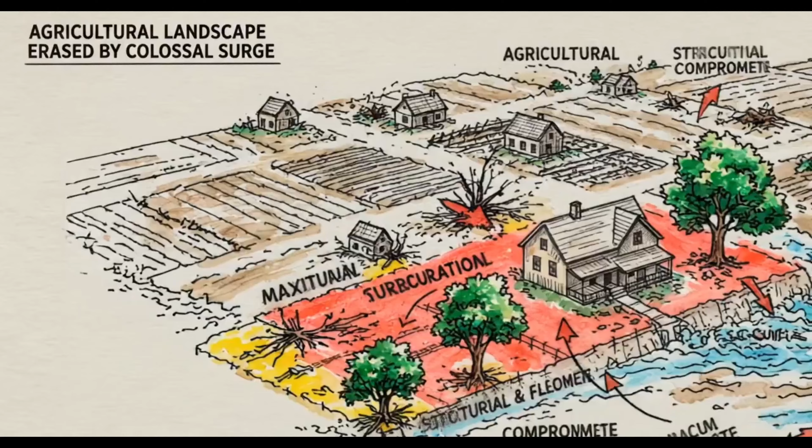In August 1975, the Banqiao Dam collapsed, releasing over 700 million cubic meters of water onto the plains below in a matter of hours. The ensuing flood wave killed an estimated 26,000 people immediately. In the following weeks, famine and disease pushed the total death toll as high as 240,000.

For decades, the official historical record attributed this catastrophic loss to an unpredictable natural disaster, but a close examination of the engineering data reveals a deterministic systemic failure.

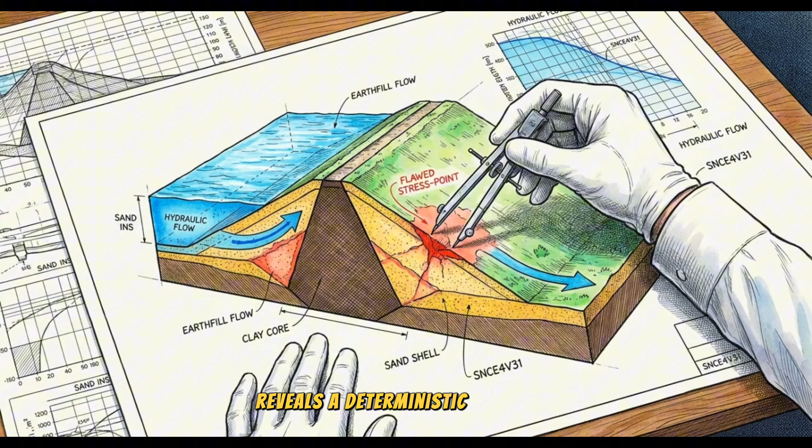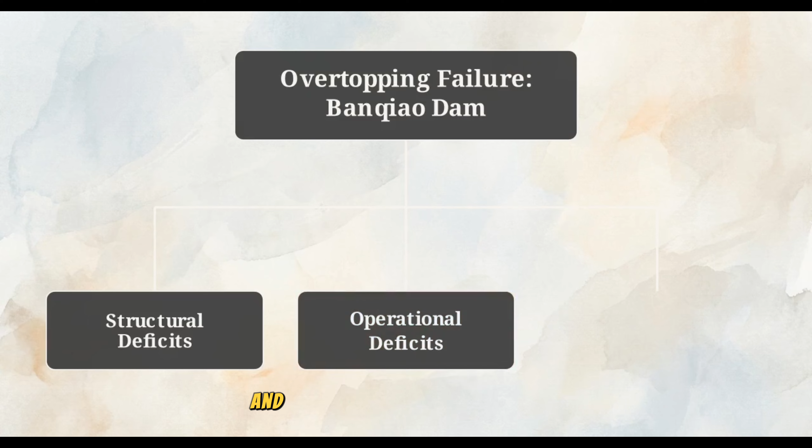To understand how the Iron Dam was destroyed, we use fault tree analysis. This model traces the collapse back to three converging branches: compromised structural integrity, an operational deficit from undersized spillways, and a cascading overload across the river basin.

Infrastructure failures at this scale rarely stem from a singular meteorological anomaly. They are the result of compounded systemic breakdowns.

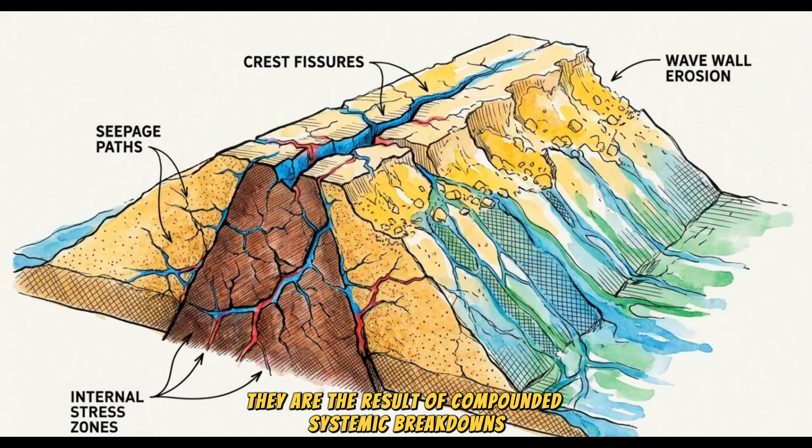Originally built under Soviet guidance, Banqiao was an earthfill embankment featuring a central clay core surrounded by a sand shell. During initial filling, poor compaction caused stress fractures to propagate within the core.

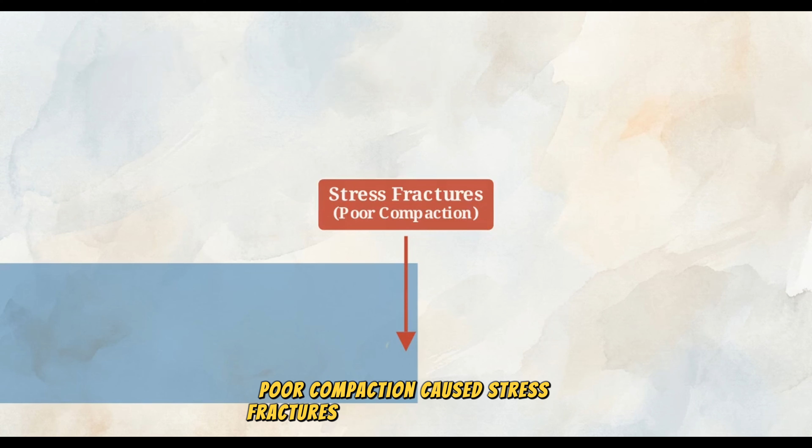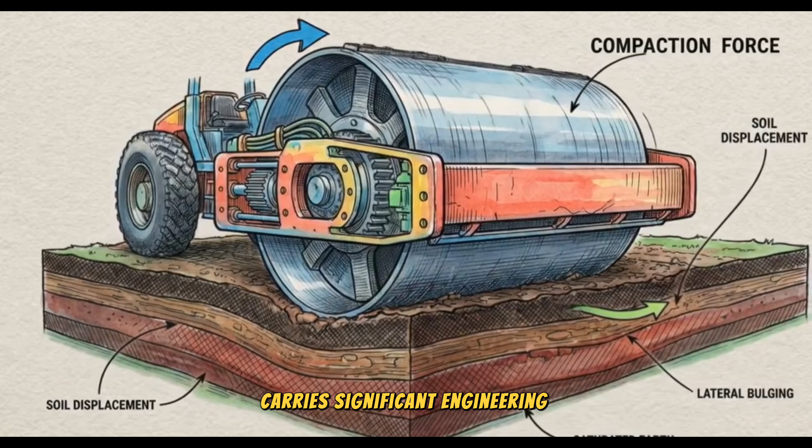To address cracking, engineers raised the embankment, doubling the reservoir's capacity. Modifying an earth-filled dam after the soil has already settled carries significant engineering risk, as it permanently alters the structure's intended pressure distribution. The resulting dam was constrained by the limited historical data available at the time.

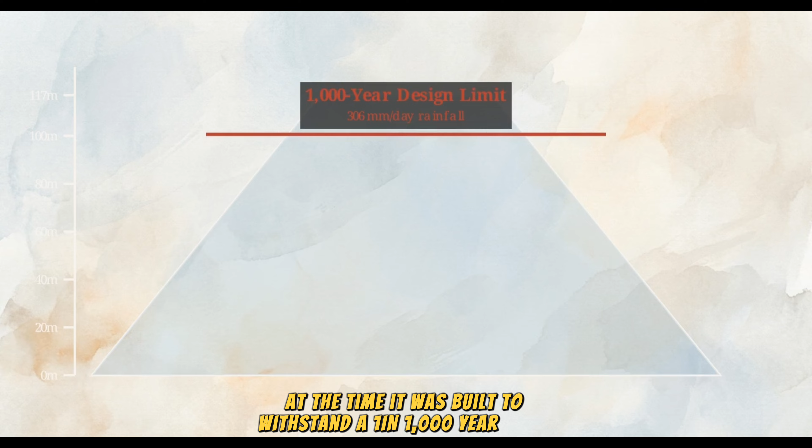It was built to withstand a 1 in 1,000 year flood, allowing for a maximum discharge of 3,092 cubic meters of water per second. Recognizing the severe typhoon climate, hydrologist Chen Xing argued this discharge rate was mathematically insufficient, recommending 12 sluice gates.

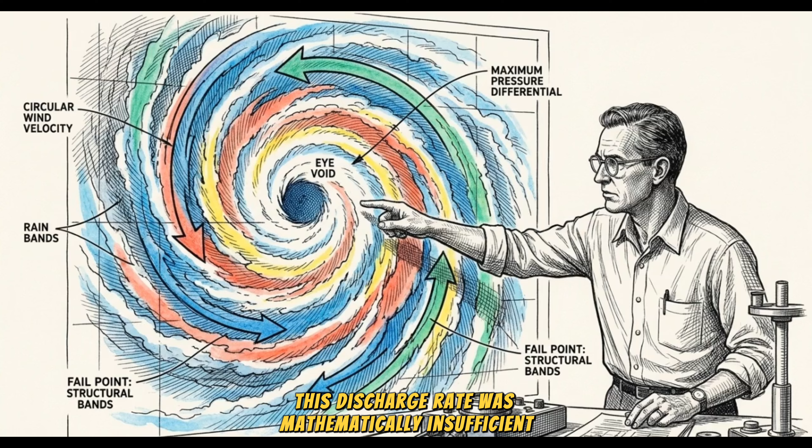However, political directives prioritized rapid agricultural water retention over flood safety. Officials overruled Chen Xing's data, mandating a reduction to only 5 sluice gates. Subordinating empirical engineering requirements to political timelines permanently stripped the dam of its critical safety margins, years before the fatal storm even arrived.

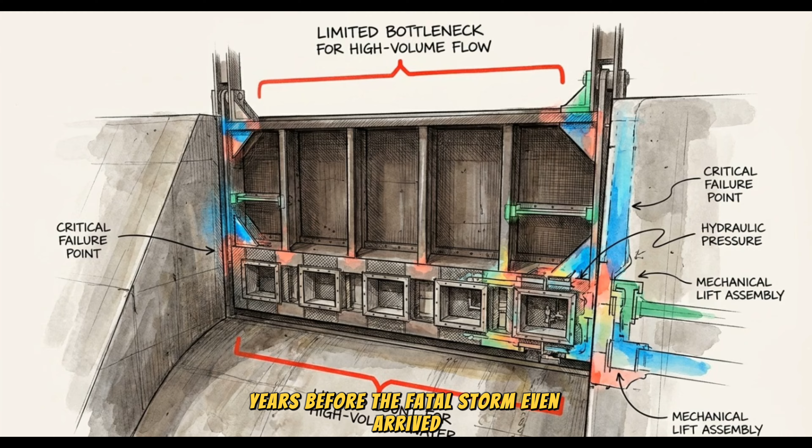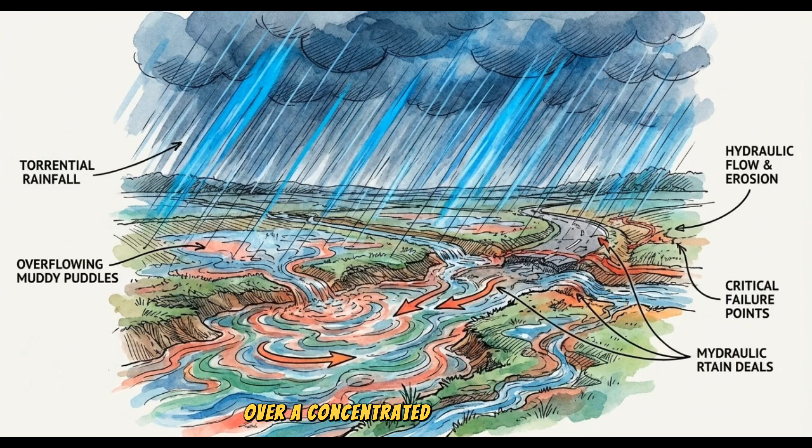The primary meteorological trigger arrived in August 1975, when Super Typhoon Nina collided with a cold front and stalled directly over Henan Province. Over a concentrated 72-hour period, the system dumped 1,060 millimeters of rain onto the region. This 3-day deluge exceeded the total average precipitation the area normally receives in an entire year.

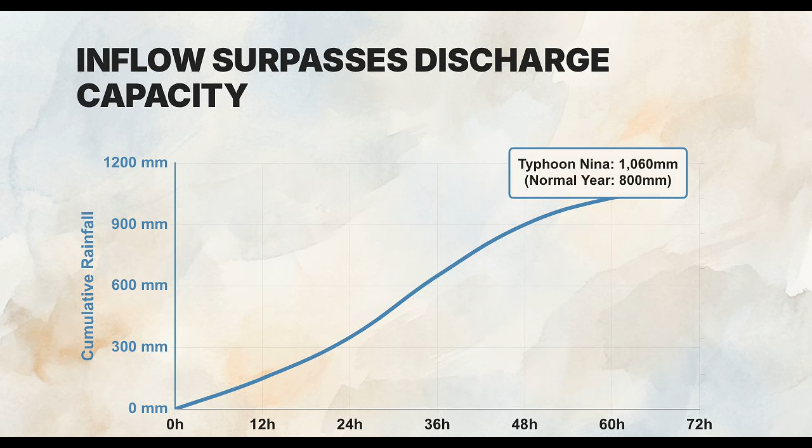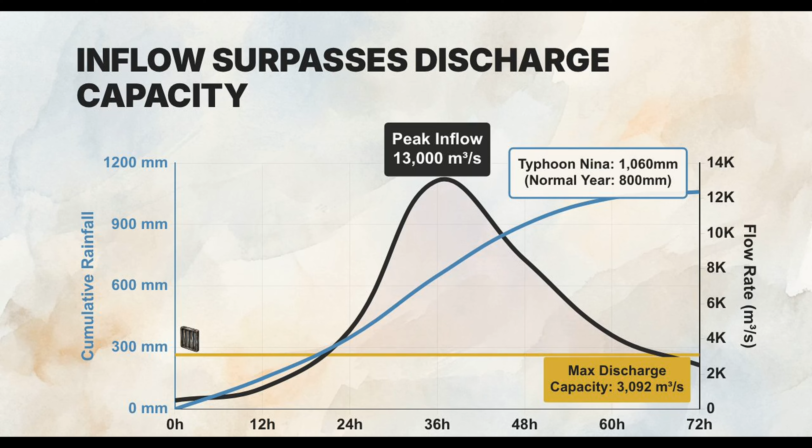This dual-axis graph shows the severe bottleneck. The storm generated an extreme inflow of 13,000 cubic meters per second, towering over the flat maximum outflow capacity of 3,092. With only 5 gates, this massive vertical gap guaranteed the reservoir would rapidly overfill.

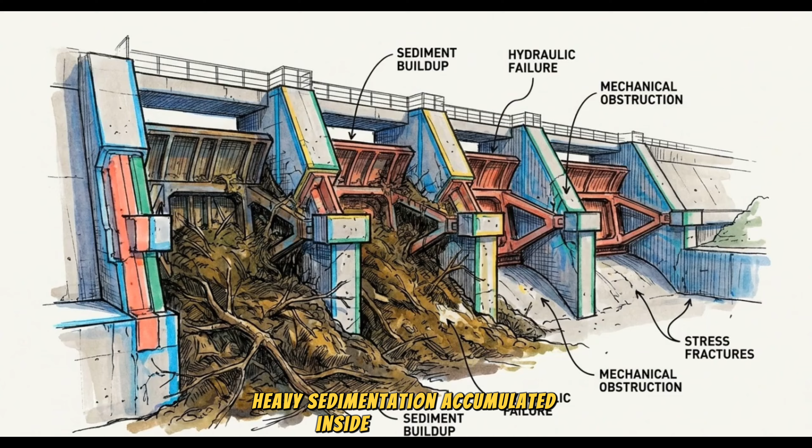Compounding this deficit, heavy sedimentation accumulated inside the reservoir, partially blocking the existing gates and reducing the actual discharge rate below the theoretical maximum. In modern hydrology, the absolute worst-case weather scenario is called probable maximum precipitation.

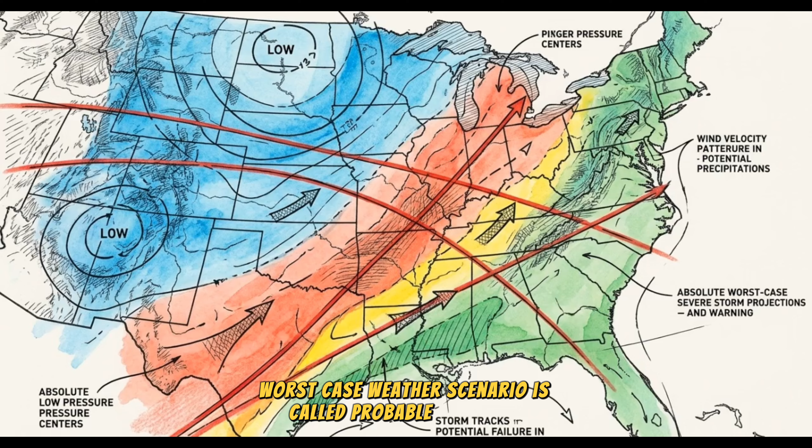Typhoon Nina generated rainfall that far eclipsed the flawed 1 in 1,000 year model used to design Banqiao. Failing to design for probable maximum precipitation created a terminal mathematical deficit that no physical structure could overcome.

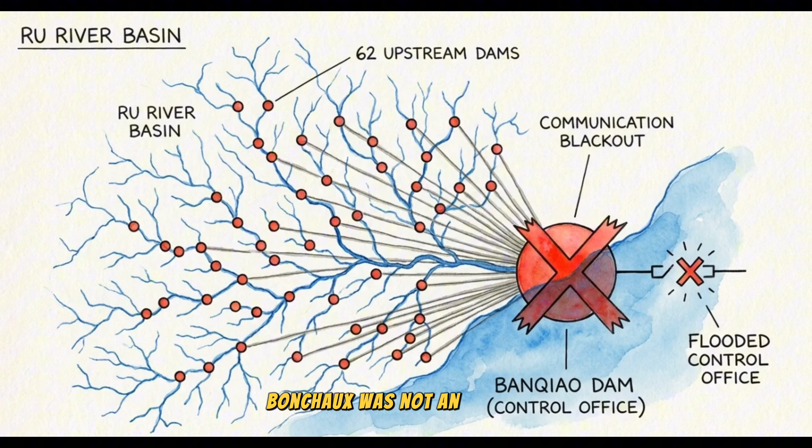Banqiao was not an isolated structure. As this topographic map shows, it sat downstream of 62 localized dams within the Ru River Basin.

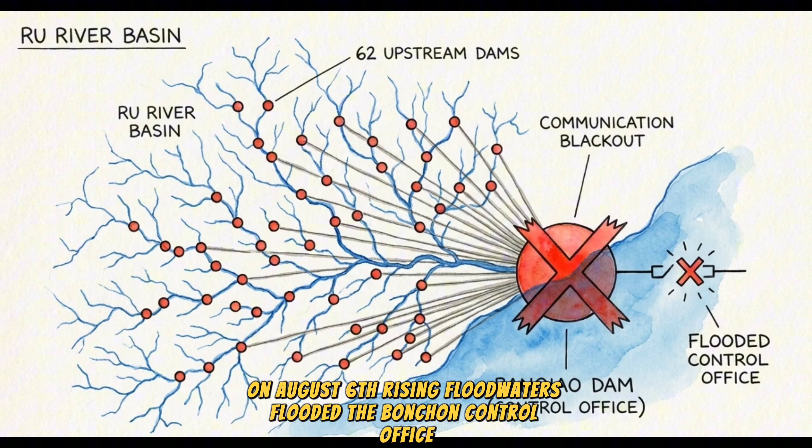On August 6th, rising floodwaters flooded the Banqiao control office, shorting out the telephone switchboards. This severed all communication, resulting in a total loss of situational awareness. Operators could no longer receive upstream weather data or coordinate evacuation orders for the downstream towns.

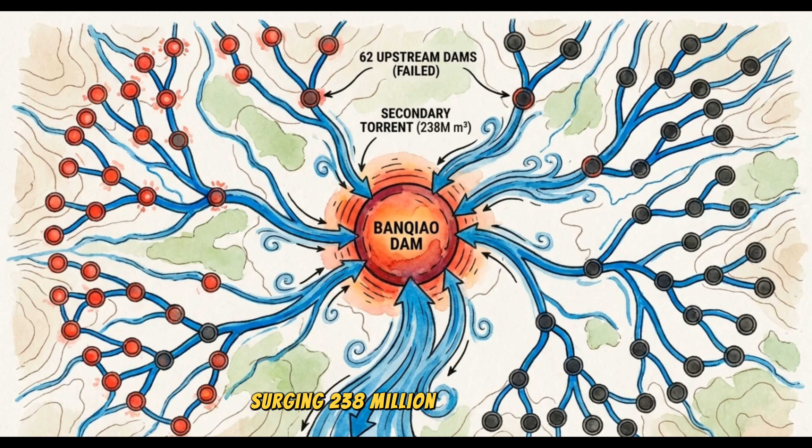On August 7th, the upstream dams reached their absolute limits. A catastrophic domino effect began, as all 62 smaller dams breached sequentially. These failures unleashed a secondary torrent, surging 238 million cubic meters of water down the channels directly into the Banqiao Reservoir. This unpredicted secondary wave was equal to 40% of Banqiao's original water volume, delivering a devastating blow to an already crippled system.

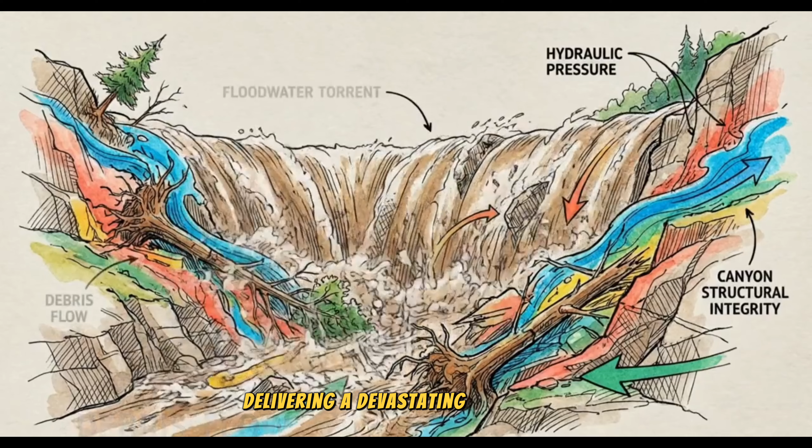When an entire basin's flood control relies on interconnected structures, lacking independent safety margins, a systemic overload is inevitable. At 1 a.m., the reservoir crested over the wave protection wall, initiating overtopping.

High-velocity water scoured the downstream face, rapidly eroding the sand shell. Without this restraint, the vulnerable clay core collapsed, resulting in a total structural washout.

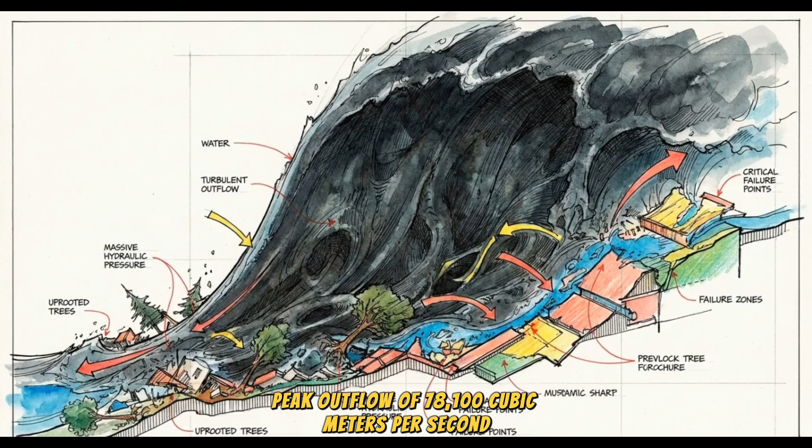As the dam gave way, it generated a catastrophic peak outflow of 78,100 cubic meters per second. To put that massive outflow rate into perspective, it is the equivalent of emptying over 31 Olympic-sized swimming pools every single second. Earth-filled dams possess zero tolerance for overtopping.

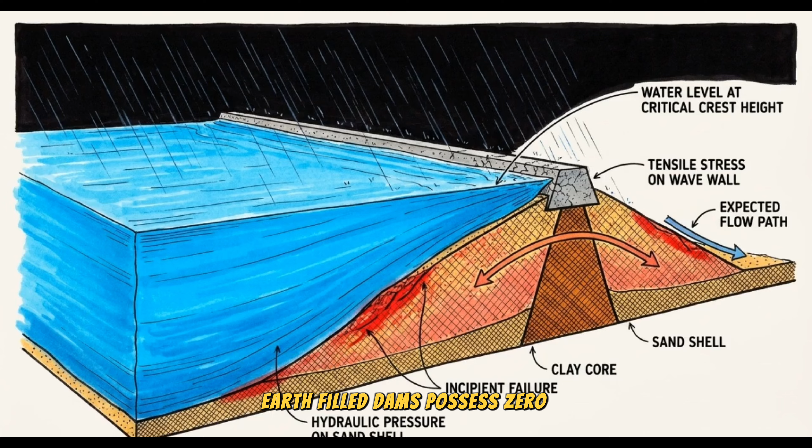For these structures, maintaining precise spillway capacity is a matter of absolute structural survival. The resulting flood wave measured 10 kilometers wide and up to 7 meters high, rushing onto the plains below at nearly 50 kilometers per hour, completely obliterating everything across the massive agricultural landscape.

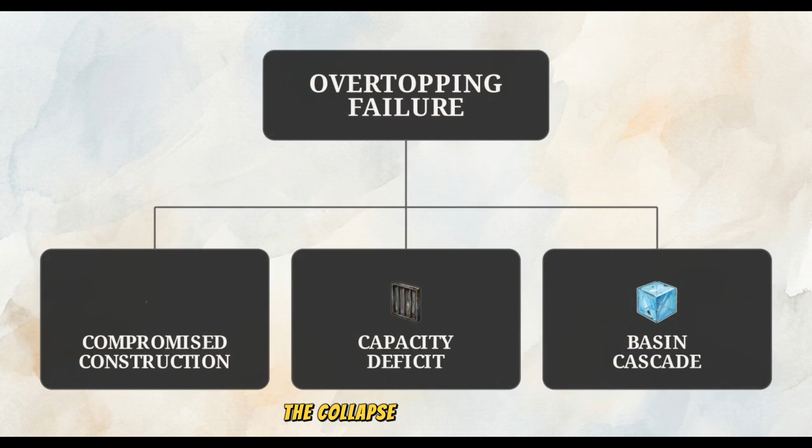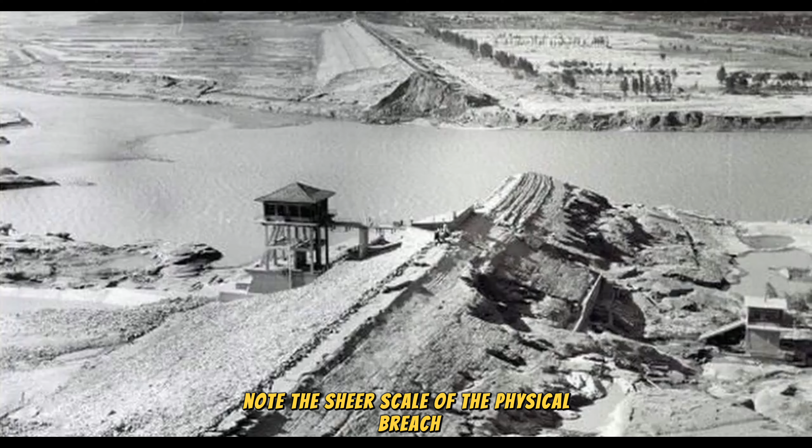Returning to the fault tree, the collapse was inevitable. The compromised construction, the capacity deficit from missing sluice gates, and the basin cascade all converged on the final overtopping failure node. The sheer scale of the physical breach is visible in historical photography, showing a massive void where the central embankment used to stand.

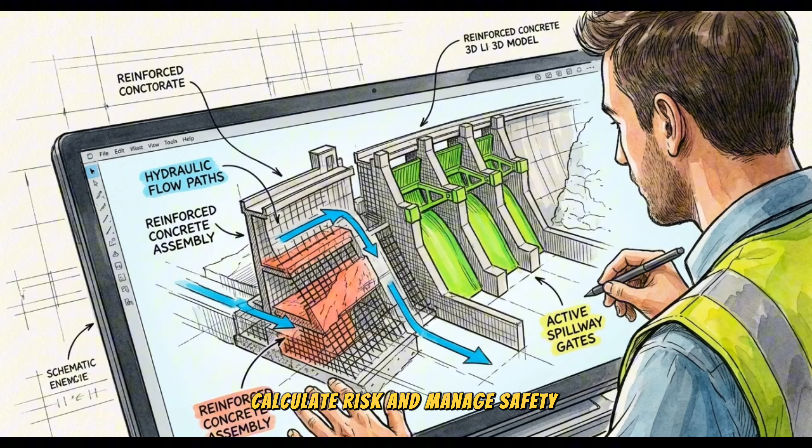The Banqiao catastrophe was the predictable intersection of extreme hydrology and suppressed engineering fundamentals. This disaster led to an immediate overhaul in how engineers calculate risk and manage safety for high-hazard dams worldwide.

Today, modern dam safety practices dictate that high-hazard structures must be explicitly designed to withstand the probable maximum flood, the most severe combination of meteorological conditions reasonably possible. When infrastructure failure guarantees mass casualties, relying on historical rainfall averages is a dangerously insufficient constraint.